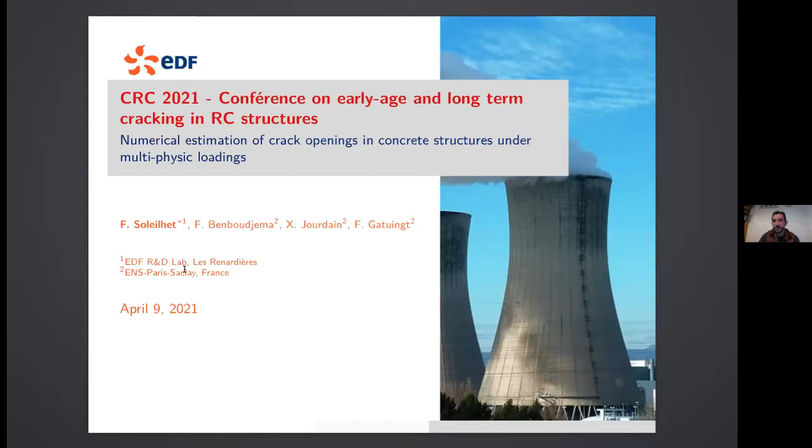So a bit of context: as you all know, cement-based material is widely used, and concrete material too. One of the major issues of concrete and cement material is cracks, because it may induce durability issues. It may favor penetration of aggressive species like chloride, carbonation, and so on, and sometimes allows leakage.

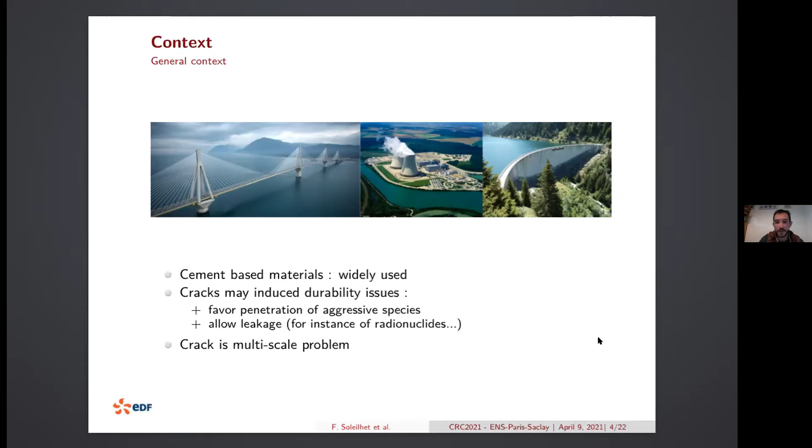The crack is also a multi-scale problem because it goes from the component scale, like the CSH, the aggregate, and it's also a macro-scale problem. So it's a bit difficult to model, and there are different approaches to model crack in concrete material.

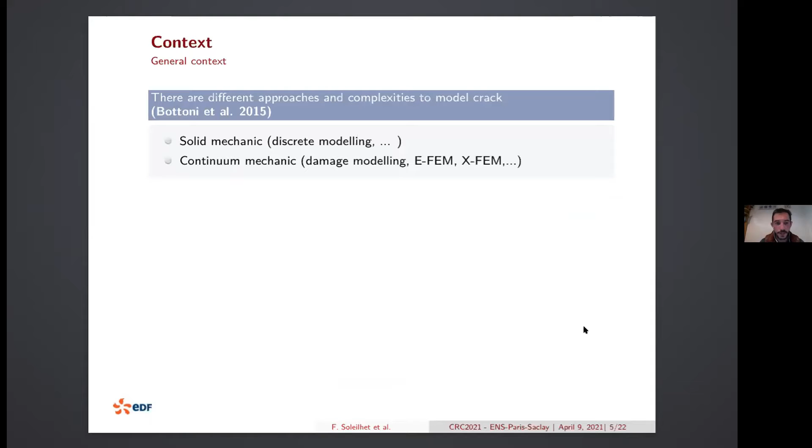There are different approaches and different complexity, whether the modeler is interested in incompatibilities, structural applications, and so on. There are two different classes of model: models based on solid mechanics, like discrete modeling and other models, and models based on continuum mechanics, like damage modeling, E-FEM, X-FEM, and so on.

Damage is an approach often used in the modeling of cement material because it is affordable regarding calculation time, and it allows capturing the failing process of the concrete material. But in this approach, cracks are not modeled explicitly. We only have diffuse microcracks, represented with the damage index.

So to get some crack opening information, we need some tools, some post-processing technique to calculate cracks from the damage index.

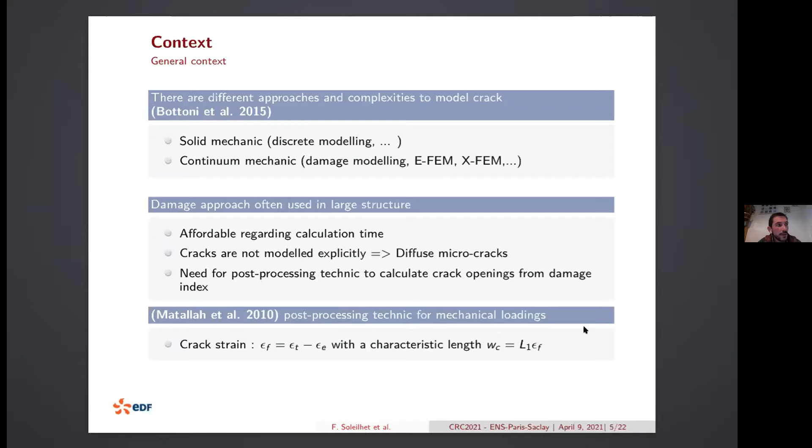As an earlier study, Matallah et al. propose a post-processing technique for mechanical loading only. It is based on the decomposition of the total strain into an elastic part and an inelastic part. Then with a characteristic length, like for instance the length of the element, it's able to compute a crack opening. But it is based only on mechanical loading, and the question is, what happens if other strains are added?

Like for instance, when you model shrinkage, you model creep, and so on. With this approach, there is a problem: it gives an underestimation or overestimation of the crack opening.

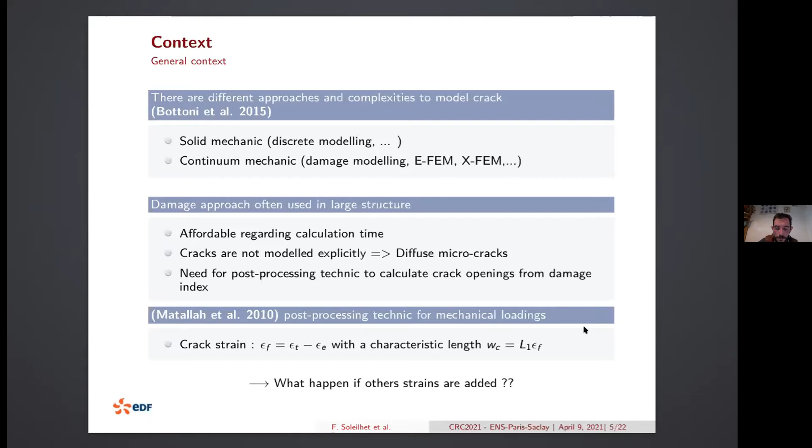So to answer this question, we take a classical damage mechanical model, like the first one proposed by Mazars, the isotropic damage model, that links the stress to the strain with the fourth-order tensor C, the stiffness tensor, and a scalar variable D that reduces the stiffness.

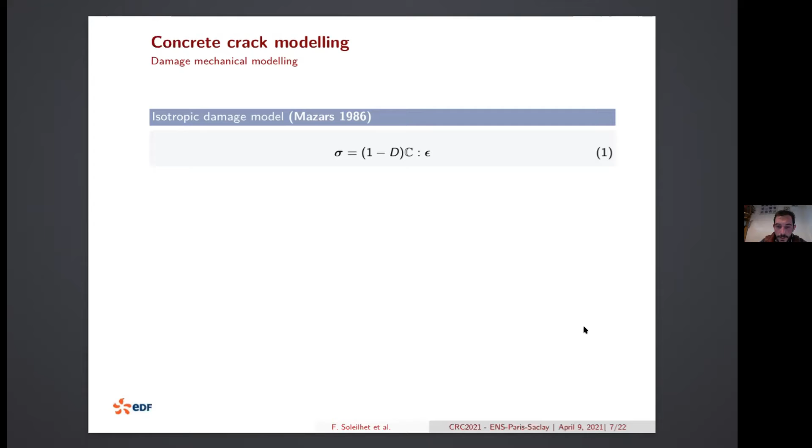The evolution of this damage variable is taken as proposed by Feenstra for the damage variable in tension. And in order to prevent mesh dependency, we use an energetic regularization as proposed by Hillerborg, that links the amount of energy of each element to the size of the element.

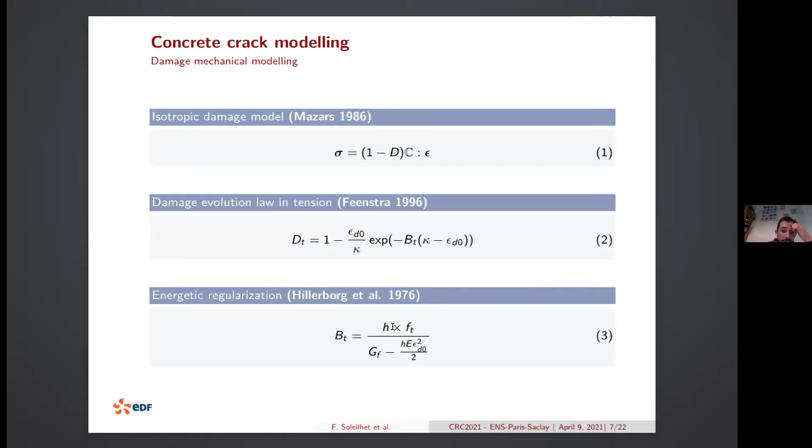And we calculate this value from sigma 1, which is the result of the structural equilibrium. So all the deformations taken into account in the modeling are already considered in this sigma 1.

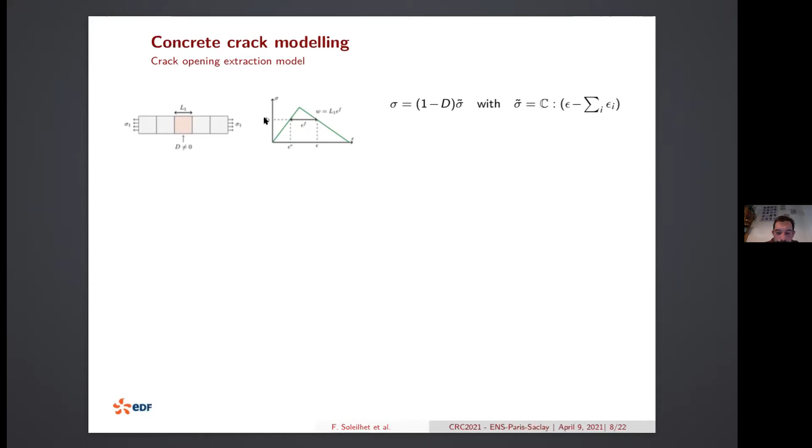So what you can see is the post-processing technique. It is based on 4 stages. The first one is to compute the total strain from the damage index, the compliance tensor, and the total stress tensor. Then we are able to compute the elastic strains from the undamaged compliance tensor.

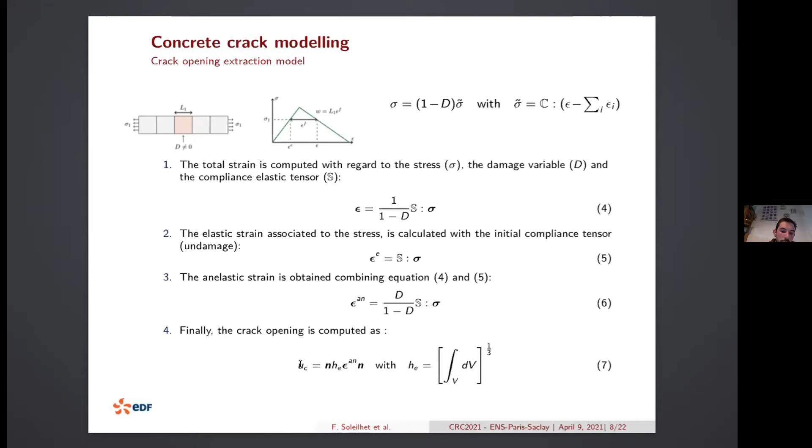And finally, we are able to compute an anelastic strain. And with the computation of a characteristic length, we are able to compute a crack opening.

So let's see some practical case studies. The first two are rather simple case studies: we consider two imperfect rods under different types of loading. The first one is free to deform, and the second one is restrained. Each is composed of 10 elements of the same size and same material, except one, the number 6 for example, which is imperfect—its tensile strength is equal to 50% of the nominal tensile strength.

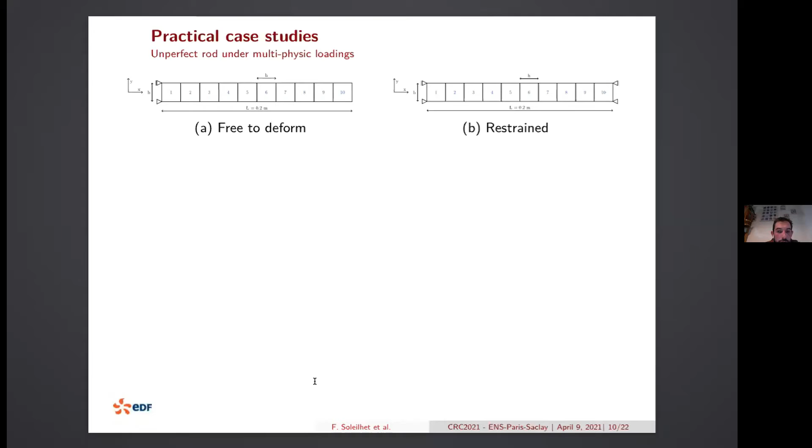We set a bunch of mechanical parameters like the tensile strength, the Young's modulus, and so on, and we apply 2 fictitious loadings: the first one, the blue one, is fictitious drying shrinkage, and the second one is thermal strain due to the evolution of temperature, for instance. Then we compare to the theoretical expression of crack opening in 1D.

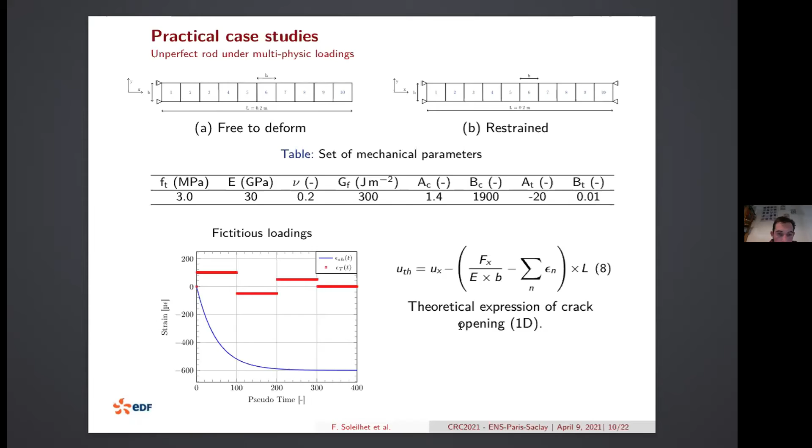So let's go to the results. On this plot, you can see on the left side the result of the rod that is allowed to deform, and on the right side the result with the rod restrained. As expected, when the rod is free to deform, there is obviously no crack because it is free to deform, and the theoretical value is equal to 0 all along, and the proposed method is also equal to 0. However, you see that Matallah et al.'s first post-processing technique gives something different from 0.

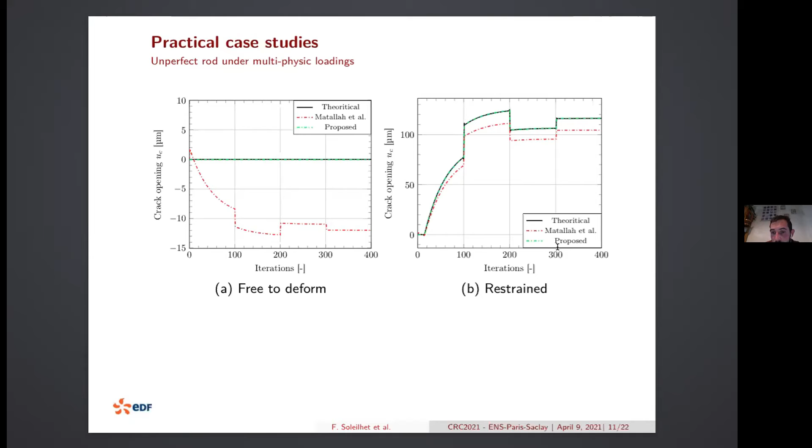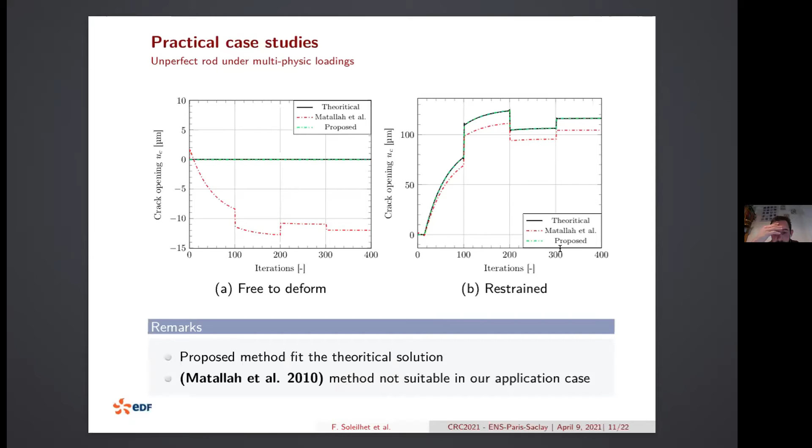When you consider the restraint condition, you see that the proposed method follows the theoretical results, and there is a gap between the method proposed by Matallah and the theoretical value. So in this case study, the proposed method fits the theoretical solution, and Matallah's post-processing technique is not far off, but is not suitable for our application.

The second practical case study is a bit more complex, but we try to go further. So we investigate the response of the post-processing technique on a shear wall under drying.

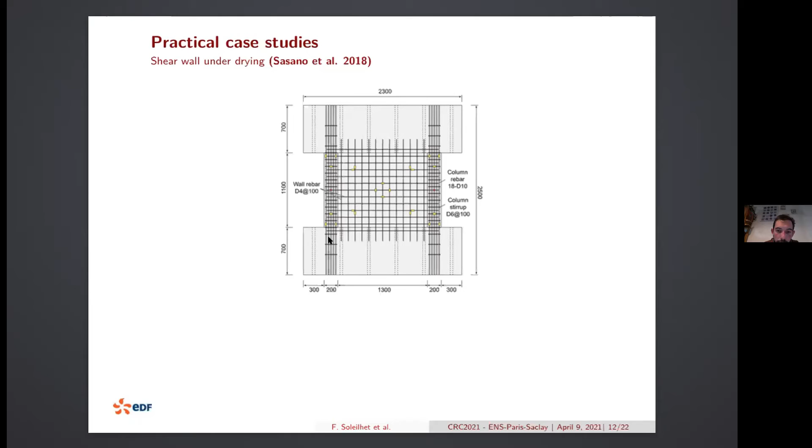There are two stubs, on the top and on the bottom, with a wall between these two stubs. The entire wall is reinforced with rebar, and there are two steps.

The first step is the aging of the wall under 58.7% relative humidity and 18.4 degrees Celsius for one year. And then there is the dynamic loading.

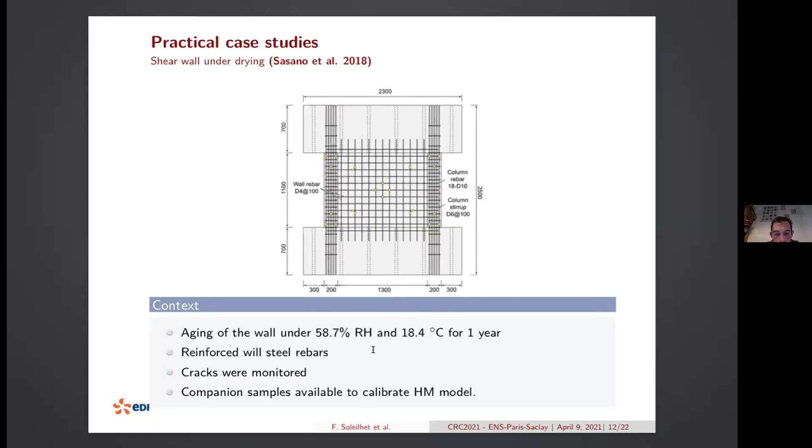In this study, I focused only on the aging part of the Sasano study. The interest of this study is that Sasano monitored all the cracks during the aging and loading phases. They also provide companion samples that allow us to calibrate our hydromechanical model.

So to age this wall, we need a hydromechanical model. We use our mechanical model, but as soon as the thermohydromechanical model uses a damage variable, it is possible to do the same study. I won't go into detail because it's not the purpose of this presentation.

In this model, we have the first stage with mass balance equation and equilibrium equation. Then the drying shrinkage, the one proposed by Biot-Coussy. We account for creep using a burger aging materials model, and the drying creep is taken into account linearly with the links between drying shrinkage and drying creep, using a lambda coefficient as a scalar variable.

Then the mechanical model takes into account the capillary forces and the effective stress, accounting for all the added deformation. This model needs to be calibrated.

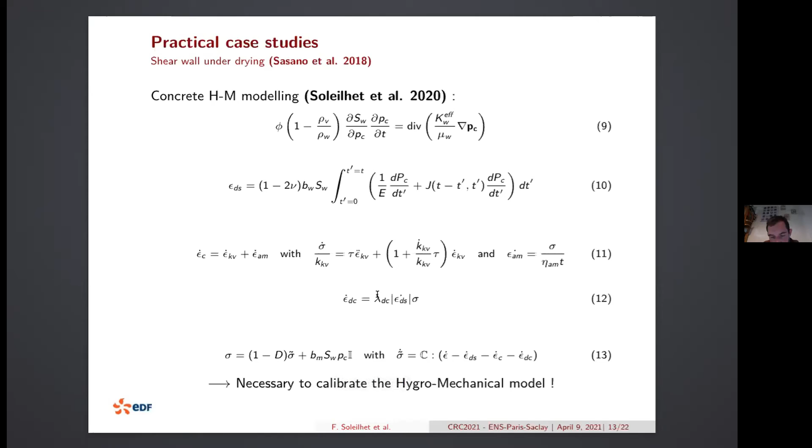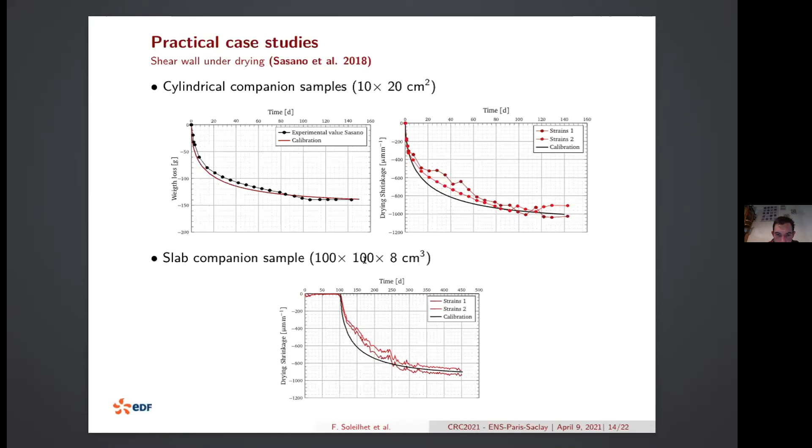I won't go into more detail about the calibrated parameters. They are all available in the conference paper if you are interested.

Another important point: in order to favor the localization of the cracks, we use random fields on strength resistance, the one proposed by Matheron, the turning bands method, with a coefficient of variation of 10% and a correlation length equal to 3 times the biggest aggregate. The biggest aggregate was equal to 15 millimeters.

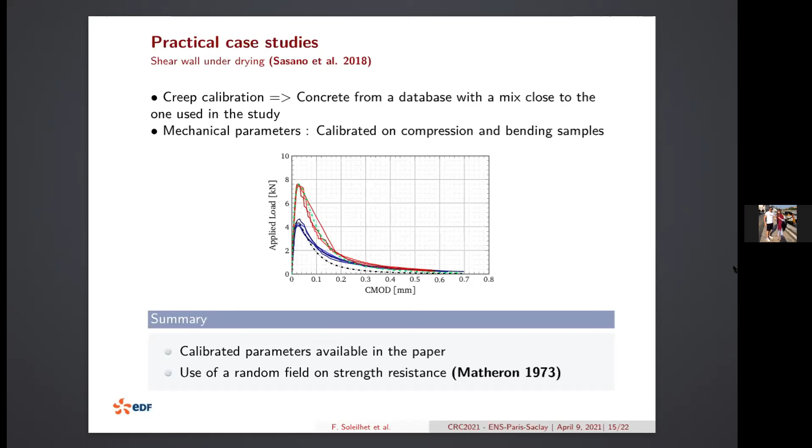Some details about the modeling: rebars are elastic, and it's assumed there is perfect adhesion between concrete and rebars.

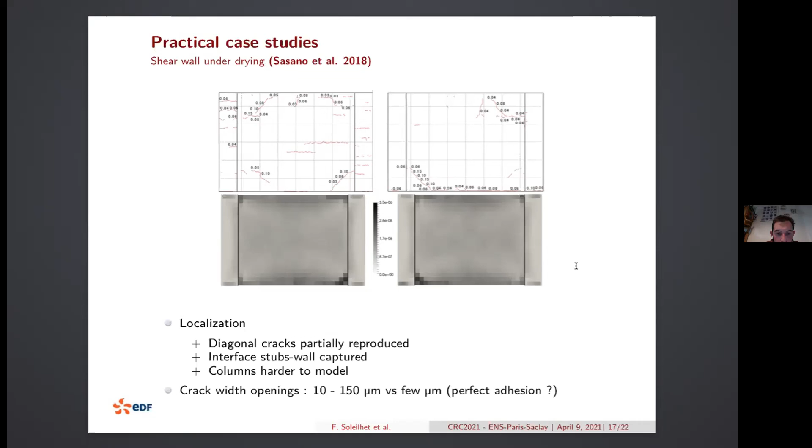So, some take-home points to conclude this presentation. Crack is an important feature of concrete material, and it's often modeled with damage approaches. One drawback of these approaches is that cracks are not explicitly available, so we have to use a post-processing method.

Our method was tested and validated on simple tests, and we tried to confront this method with a semi-structural application. Of course, it's not perfect, but the routine managed to locate areas where cracks develop and slightly underestimates crack opening. This simple post-processing method is compatible with other multi-physics models, as long as there is...